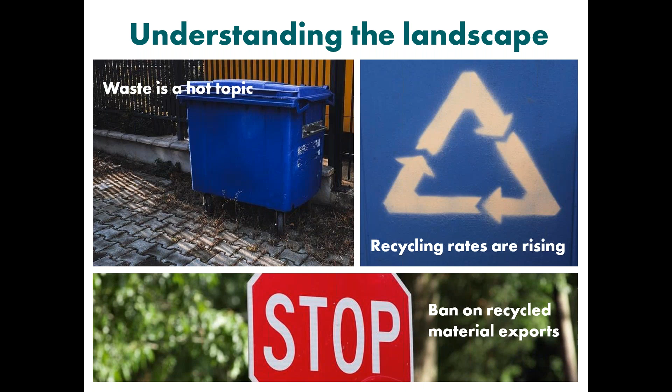But there's still a long way to go, which is undoubtedly why the government is backing this eco drive, having announced a ban on exporting recycled materials in recent times. This was a bold pledge, but why should you be letting go of a valuable resource that you could harness the value from yourselves here in Australia?

Recycling creates jobs, reduces reliance on raw materials, boosts resource security, better protects the world's resources, and can generate revenue for those involved in the sector. But what happens next? Of course, you need to further invest in your infrastructure so that you have the ability to undertake more recycling processes yourself and the capacity to then turn these recyclables into something new.

But I think there's even more to be done. Yes, the priority should always be the reduction of waste at source. Then there's the reuse and recycling of materials. But it's possible to do something with the residual materials too, transform them into a renewable fuel source for energy recovery.

In terms of that transformation process, there are a number of input materials or waste streams capable of being turned into an alternative fuel, and I've included a selection on the screen for you. I'm mindful that some of you will know quite a lot about these topics already, whereas for others, the topic of alternative fuel production will be relatively new. I therefore don't want to patronise anybody by going into detail that you're already incredibly familiar with, but at the same time, I don't want to simply assume that we're all on the same page.

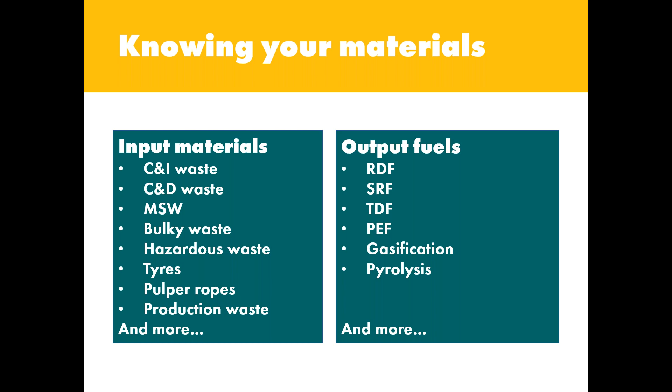So before we delve into the detail about how to manufacture such fuels, I think it's firstly important to explain what they are, and to do this, we need to understand what the acronyms are. As a group, they represent a type of renewable fuel that can be manufactured from sorted, shredded material arisings that most people would simply consider waste. Once produced, these fuels can be used as an energy source in facilities such as power plants and cement kilns, instead of these operators relying on ever-depleting fossil fuels such as coal, oil and gas.

While all fuels you see on the screen will have been manufactured following a rigorous treatment process, generally speaking, the following applies. RDF is usually the least refined fuel type, and RDF is a fuel produced by shredding and dehydrating solid waste. RDF consists largely of the combustible components in municipal waste such as plastics and biodegradable waste, and has a lower calorific value than solid recovered fuel, being SRF.

For companies looking to achieve zero waste to landfill, converting some of their waste into RDF is a great solution. Rubbish or trash that would otherwise end up sitting in a landfill site is instead put to good use as an alternative to fossil fuels. RDF can be made from municipal solid waste, MSW, and commercial industrial waste, C&I. Specifically, RDF consists of combustible materials such as non-recyclable plastics and paper, which can be burnt to create energy.

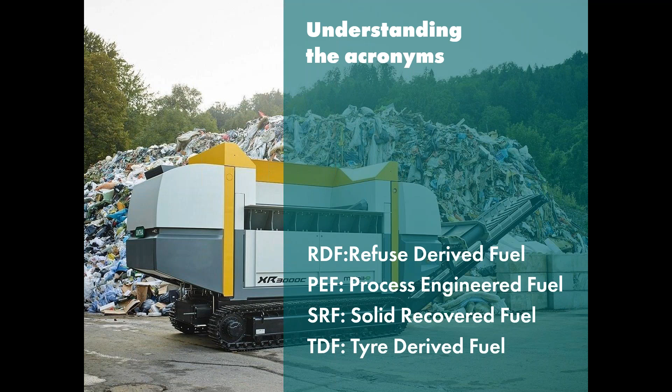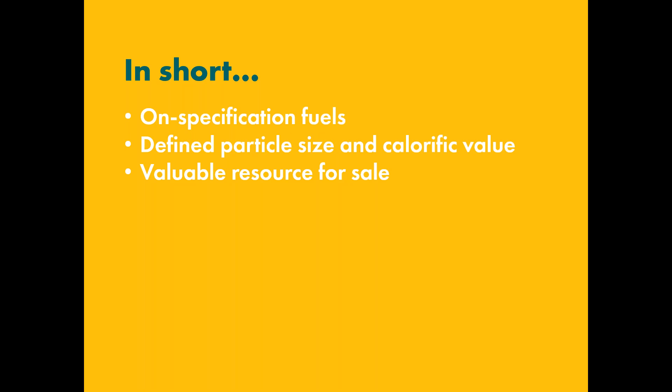In simple terms, however, thanks to technological innovation, each of these fuels can be manufactured to a predetermined specification, either set by industry or the actual user of the fuel. There are various routes to market for these fuels. In the European cement industry, for example, a number of operators now produce their own RDF, PEF, and so on to boost their environmental agenda and reduce their reliance on fossil fuels. Other organisations buy RDF and PEF from the fuel producers for the same reasons, which represents a fantastic revenue stream for the organisations concerned. Some specialists are already exploring this market in Australia, and ideally we want to see much, much more of it.

But recovery effectiveness starts with defining the perfect shredder specification. Get this right and the payback period for the equipment will soon be accelerated, plus the margins maximised, especially if you can produce a fuel in one step, i.e. one machine. So what exactly should operators look for? We've mentioned time and time again in supplying shredding equipment that there's no such thing as one size fits all. The UNTHA XR is naturally the alternative fuel production shredder I know most about. And in the simplest terms, this is one machine capable of manufacturing these fuels in a single step. However, there are thousands of possibilities when it comes to the XR because it is ultra configurable.

To start with, we have the reliable pre-shredding RC cutting system. This machine was specifically developed for the coarse pre-shredding of difficult material flows and for high throughput rates of up to 70 tons per hour. The purpose-designed style of the cutters ensures a particularly aggressive intake behaviour for the material. The cutters and the stator bar may be re-hard faced at the end of a specific service life and then put back into service to start again. Materials processed with the RC include commercial industrial waste, C&I, domestic waste, bulky waste, waste wooden pallets, production waste, plastic bales, and so much more. Obtainable fraction sizes for the RC cutting system are typically 100 to 300 mil.

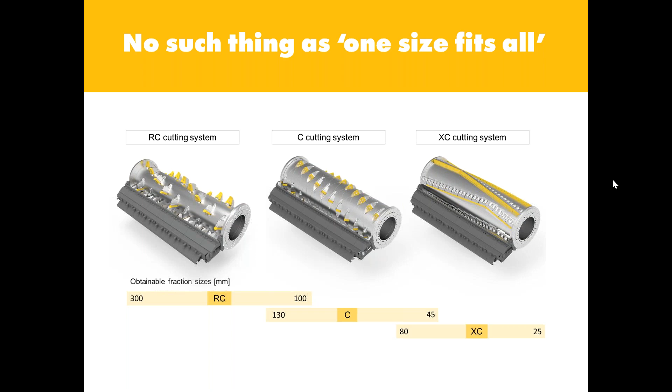So last but not least, we move on to the perfect post-shredding machine, which is the XC cutting system. And this machine was designed for processing pre-treated or FE separated materials that are destined for material or thermal recovery. The tangential cutters and stator bars may be used in 4 different ways, and again, like the C, are easy and quick to change. Materials processed with the XC pretty much include all pre-treated or FE separated material flows. Obtainable fraction sizes are between 25 and 80 mil. And it is even available as a static or mobile operation, depending on the requirements of the operator.

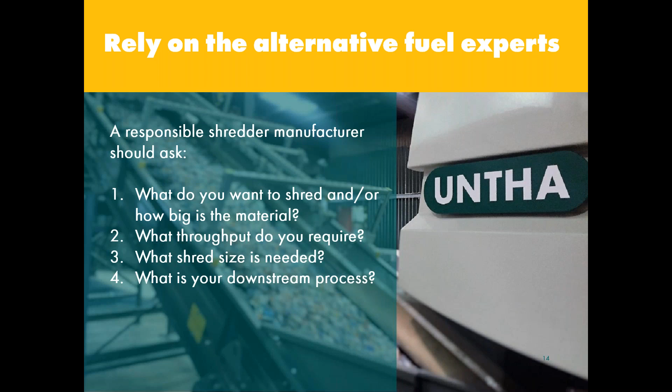Above all, the shredder should be capable of performing the job that it was purchased to do. And however experienced you are as an operator, you shouldn't be expected to know exactly which machine is right for the job. That's the job of the vendor. 4 key questions any responsible machine manufacturer should ask their customers are: what do you want to shred, and what is the largest bulky item that needs shredding? What throughput do you require? What nominal particle size is required? And what is your downstream process? The answers to these questions will give the supplier enough information to start the conversation.

Now, I'm mindful that you may not be speaking to FOCUS Enviro or UNTHA about your shredder investment. So if you're already in talks with another manufacturer, these are some of the things that I particularly recommend that you look out for. If the supplier can't talk confidently about these 8 topic areas, I would really encourage you to think about whether the shredder is fit for purpose or not.

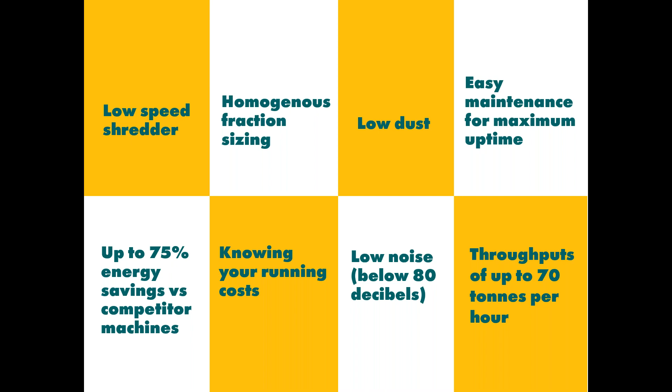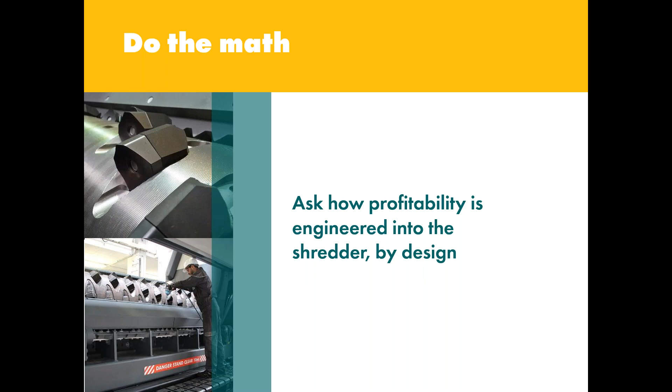Of course, you're going to care about the numbers too. The topic of this presentation is profitable alternative fuel production after all. So ask the shredder supplier this specific question. How is profitability engineered into the shredder by design? For example, when the technology is driven by energy efficient electric drive motors rather than diesel hungry alternatives, the savings are vast, both in terms of financial and environmental gain.

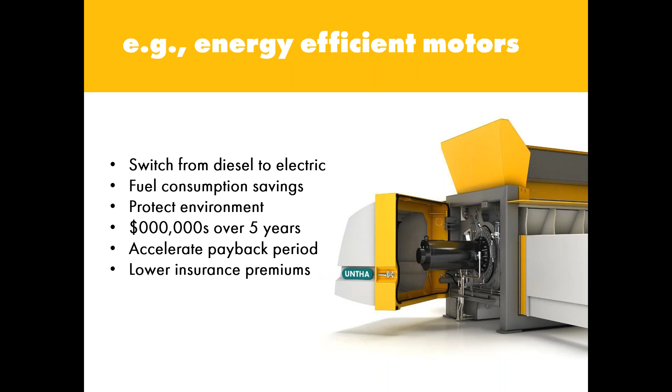Depending on the operating hours of a shredding line, fuel consumption savings can reach hundreds of thousands of dollars over any given 5-year period. Such savings will soon accelerate the payback period of the capital investment and maximize the margins the operator is able to make from their plant. From that point onward, electrically driven shredders can often help lower insurance premiums too and have much lower maintenance requirements. The UNTHA XR systems are known to be up to 75% more energy efficient than their diesel driven counterparts.

So you're then in a great position to build your business case for the shredder investment. The price tag matters, of course, although different finance routes can make things more affordable for organisations that need to spread the cost. However, other metrics are also important. It's crucial to calculate ongoing wear costs, as this will rapidly inflate the financial impact of the investment, as well as power consumption, as I've already said, possible revenue streams from the sale of the fuel, and many more metrics. If in any doubt regarding how to build the perfect business case, ask the shredder supplier to help. This exercise should be very straightforward for them.

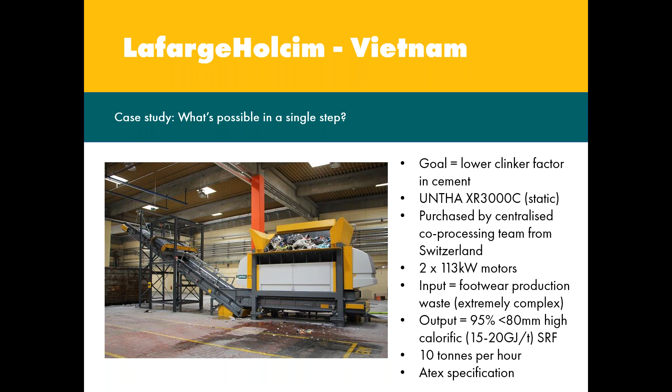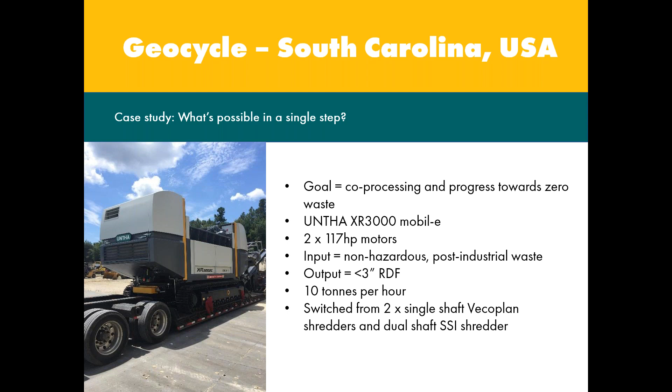Now, I'm not going to read through these case studies word for word, as you will receive a copy of these slides hopefully tomorrow, but I wanted to show you that the XR is a world-class, globally proven piece of machinery that has transformed the alternative fuel production lines of companies hundreds of times over. Here in Vietnam, it transformed footwear production waste into a cement fuel, for example. We've also worked with Geocycle all over the world. So in South Carolina, they switched out their incumbent machinery manufactured by our competitors in favour of the XR series. In the UK, I've worked closely with Jim Entwistle from Lancashire.

In the UK, I've worked closely with Jim Entwistle from Lancashire Waste. He has a fleet of our XRs because he is such a high-profile fuel producer. And as the information on screen shows, we have transformed his business in terms of capacity and profitability.

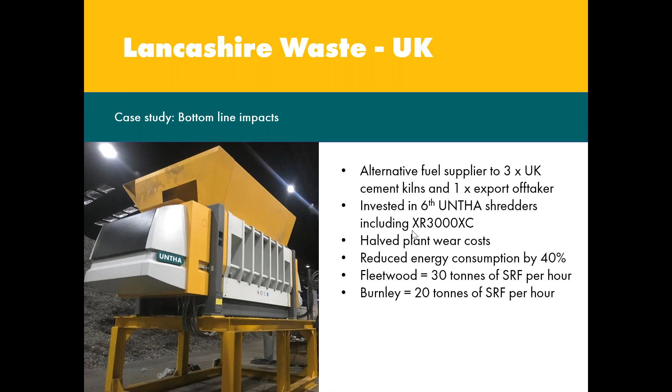Ours is an industry rich with knowledge, so ask your shredder provider if they can show you the machine in action, because seeing is believing. Plus, a visit to a reference site often allows you to speak to existing operators. You may even be able to organise a trial of a demo unit using your own materials.

And profit is not a dirty word. The world is changing, and we all need to do more to protect the sustainability of our planet. But at the same time as being environmentally responsible, there is no shame in seeking to be commercially robust.

As I've said, profit is not a dirty word, and in fact, being more resource efficient and more profitable often goes hand in hand. Everything we do at UNTHA and FOCUS Enviro is designed to help customers build sustainable and scalable businesses with maximum profitability in mind.